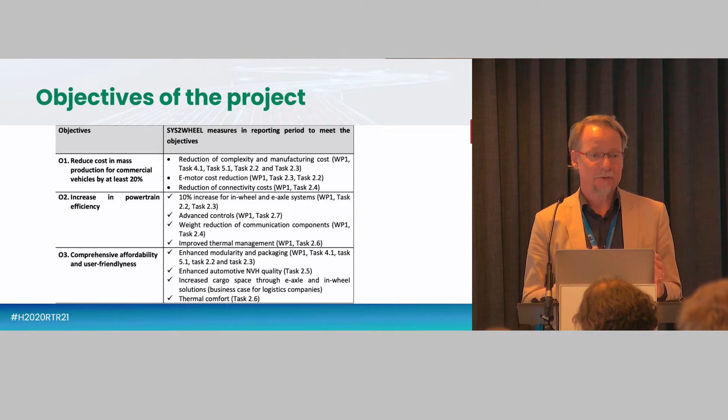So we, as Sys2Wheel, are part of a cluster of European projects where colleagues present their projects. It's called the Evolve Cluster. Evolve Cluster has its own homepage where, for all the projects in this cluster, you find dissemination material, newsletters, and quite interesting results.

Going into detail of Sys2Wheel, we are currently looking at the N1 category vehicle - remember, this is the Fiat Doblo. The Fiat Doblo is equipped with an in-wheel system: in the front we have two in-wheel motors, and in the rear this special damping system is placed, where we freed up as much space as possible for additional battery.

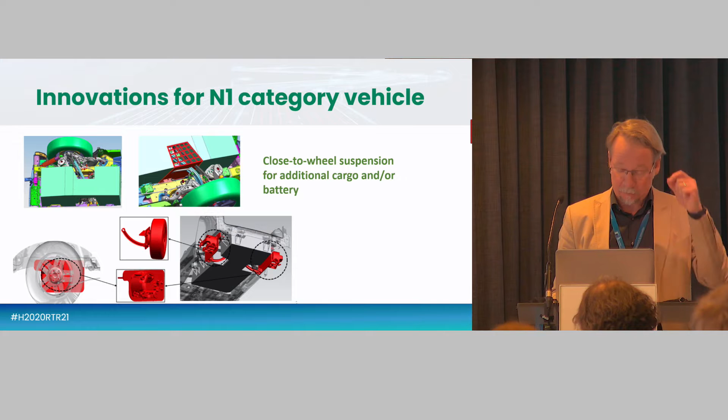So freeing the space in the center, here you see additional space available for the battery where no cells or modules could be placed before this development was installed. Here again you see the in-wheel motor in front, with additional battery space also here in the front, increasing the range.

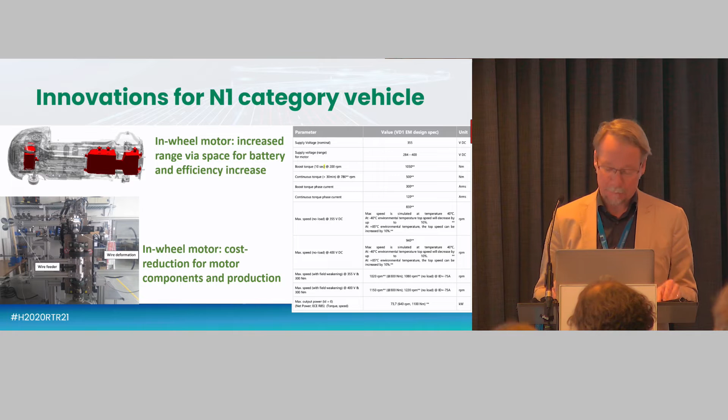So the vehicle is produced and assembled - this is as far as we got in this project with all the innovations. In the rear you do not actually see the damping system, but here you see the in-wheel motors in front with additional space for the battery.

A new cooling system has been developed, also reducing weight to a certain extent. The inverter components, also in the underhood, have been developed by Elaphe. Additional features of this vehicle include improved thermal management, as I mentioned before, and a time-sensitive network.

The time-sensitive network especially focuses on in-wheel communication between components. Some of you might know that a time-sensitive network enables safe communication in the vehicle using existing power lines, without needing additional communication cables - freeing up space and reducing weight by reducing cables for communication purposes.

Coming to the N2 type vehicle, the main innovation here is a fully modular Eaxle system. Here you see a sketch of the Eaxle, which has been produced and is currently integrated into an Iveco Daily.

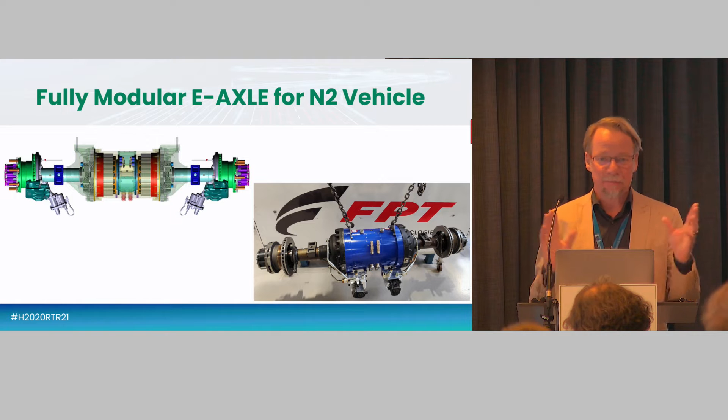Another feature is that the Eaxle consists of two different motors that can be controlled separately. This means you can also realize some torque vectoring with this Eaxle. Question is if it's needed in inner city traffic, but anyway, it's possible.

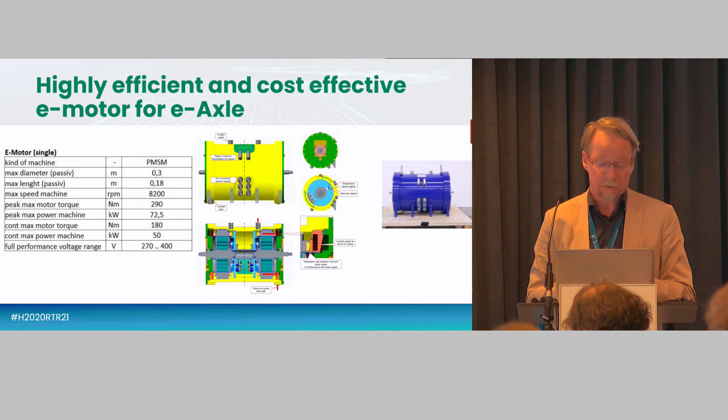Here you see the motor of the Eaxle, some 72, 74, 73 kilowatt peak power machine. It runs on 400 volt DC, with an inverter in between, of course.

So, mid to long-term expected impact. These are, of course, the impacts that are required in the call text of the GV01 call, which we meet, of course. But the more interesting thing is what happens also as some kind of side effect.

We have this from Elaphe, the in-wheel motors, and the market uptake here, the increase of number of motors sold. Elafa already started to produce this type of machine and is trying to integrate it into other vehicles as well.

The same for Elaphe, but for AVL the motor is a completely new development, and this has to be tested. There have been some issues due to COVID-19, so the tests are still lacking.

For the FPT side, the Eaxle system, this fully scalable Eaxle system, is foreseen to be put on the market end of this year, beginning of next year.

Iveco, of course, the zero emission vehicle for last mile delivery is a selling proposition. Interestingly enough, we have a very small SME on board, Habitronics. They put, for this N1 type vehicle, an energy harvesting device in the wheel, harvesting rotational energy and supplying sensors. It turned out during some advisory board meetings that this could be very useful as an additional business for logistic companies selling data collected in the wheel from road wheel contact.

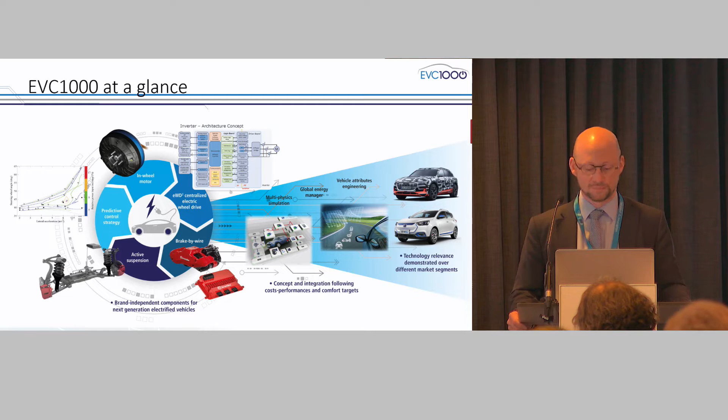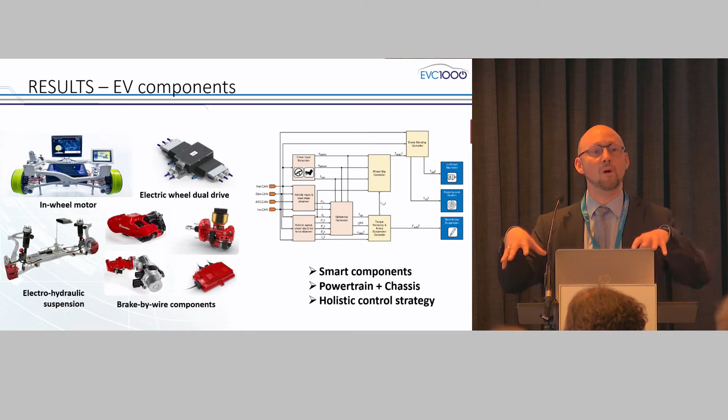So in terms of results, as we have seen before, in-wheel motor with a target to provide higher performance directly in the corner, to provide a corner solution for electromobility. Electric wheel dual drive with a target to have a better, more accurate and synchronous control of the motors. We will have as well a brake-by-wire component, in order to have more flexibility in terms of braking, and very similarly electro-hydraulic suspension, stating that for customer acceptance of electromobility, we need to improve range, reduce the cost of the battery, and take into account comfort and drivability aspects.

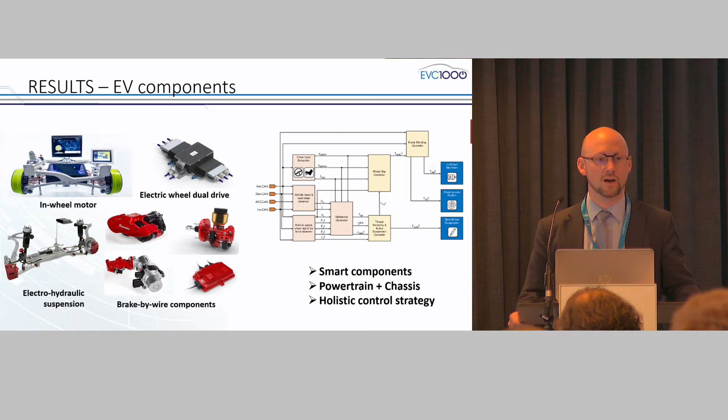This is here the target to provide different kinds of components for the powertrain and for the chassis, providing all of them a higher degree of flexibility, and to have a more advanced and more integrated control strategy at vehicle level. So here to optimize locally the efficiency of the single component, and to optimize globally at vehicle level, the operation for a specific market, for a specific targeted vehicle.

Moving to the results. Here we are in the phase to finalize a vehicle demonstration. You will have in this picture a real picture, this is ongoing work, on the Audi vehicle, where you can see on the left part the front corner with the brake system and the damper system, with Brembo and Tenneco. On the rear axle, the dual inverter mounted from Ideas & Motion, and on the rear corner, the in-wheel motor, damper system, and EMB caliper as well.

Here we are on the phase to finalize vehicle demonstrators. We are on the phase of going for homologation in order to be in the position to make a 1,000 kilometer drive on public road, and showcase that these components are sufficiently mature for later exploitation, and are in the position to really achieve the targeted project objective at the end of the day.

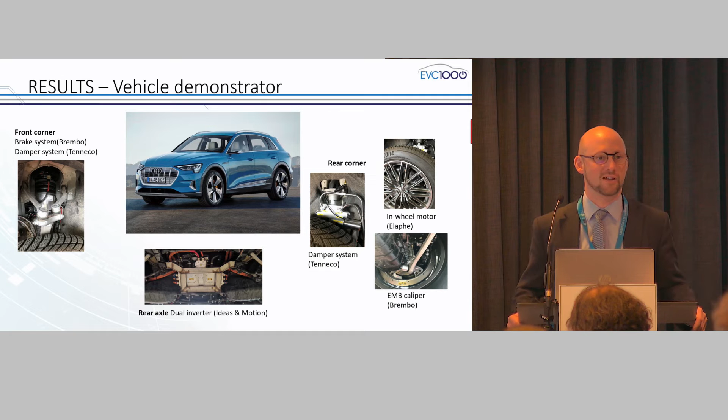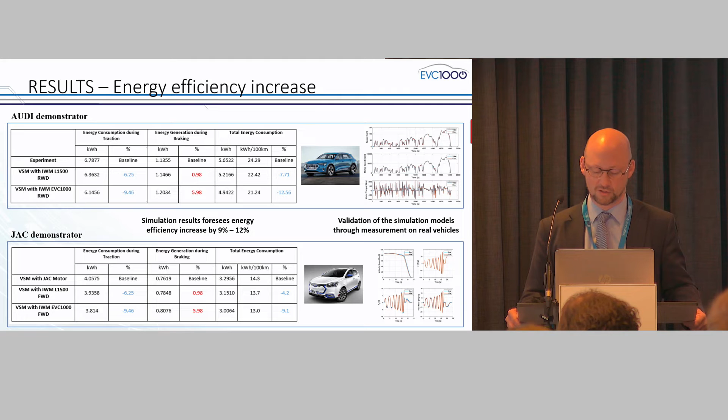Results. Very similarly, Bernard, we have already aligned our project, and we are aligning our pitch as well. We are already at the very start of the project, having preliminarily validated our target by means of simulation. During our component development, we could then validate the component-specific objectives, and for the remaining three months, we will hopefully validate these targeted objectives on a real vehicle. We'll have two vehicles in order to address these topics.

Collaboration, and I'm really happy to be here today, and I'm really happy I was there yesterday, because some of the projects we are referring to were presented already yesterday or are being presented currently today.

So here first, active collaboration with related project initiatives, focusing strongly on the E-VOLVE cluster, so that we can really exchange with sister projects, increasing impact creation through this collaboration, exchanging on specific technological aspects. You have seen that in Sys2Wheel, for example, partner Elaphe was there to provide and further enhance their in-wheel motor solution for commercial vehicles. So here we have Elaphe further on in order to improve and tailor their technology for passenger cars. This kind of collaboration has been enabled and strongly supported by the E-VOLVE cluster in this context.

I would like to mention especially the operative collaboration with the XIL4EV project, and this is an error from my side, from the VISION-xEV project as well, should be here as a second part. Rainer, please accept my apologies for that.

So here this was very interesting to have this tight collaboration with the GV02 project, providing innovative methods for the development and for the validation of EV components. This was a possibility for us to accelerate our development and validation through innovative methods, with the direct participation of different partners present in this project.

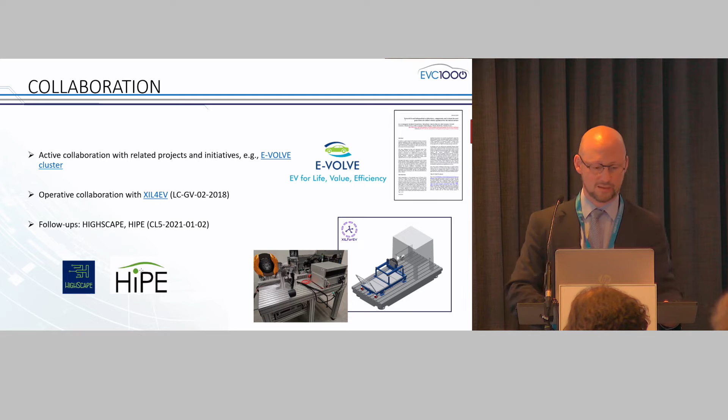In terms of impact, as mentioned at the very beginning, our target was to showcase how far these new components are scalable in terms of targeted market. This was with the usage of two vehicles, so we have the possibility to address the user-friendly, affordable EV market with a JAC vehicle, and the high-performance EV market with the Audi vehicle. So here, showcasing that these components are suitable and customizable for different kinds of markets.

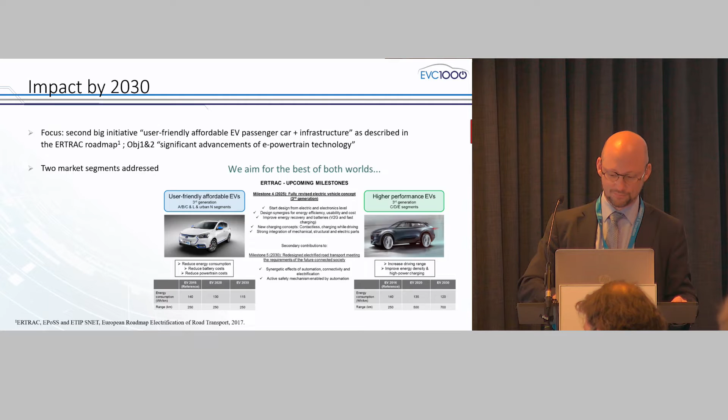Following, and the last slide from my side, here's the question in terms of impact 2030, future research needs. In our opinion, the topic of technology convergence is a very important aspect, in order to provide innovative components which are then integrated for mission-specific activity. This is a very important aspect: the convergence toward connected automated mobility, the convergence toward smart mobility, and really tailored road application.

Expected market uptake for technologies and solutions developed in our project: we have different stages of maturity. We have a component on one side which already has a high degree of maturity and will soon be available on the market. We have other partners, especially car manufacturers, who were very interested to explore the technology in order to have a sound basis to make a strategic decision on how far to move towards this technology, or what is the appropriate timeline to make this transition. So, different maturity in terms of technology, but high interest and high commitment from all the partners.

Consortium plans to ensure follow-up of project activity - already mentioned a different follow-up project already granted - and I'm really happy and proud to say that we already have bilateral collaboration that rose up out of this activity. The partners are interested to further collaborate together in a more bilateral aspect. To my opinion, this is a very strong success as well.

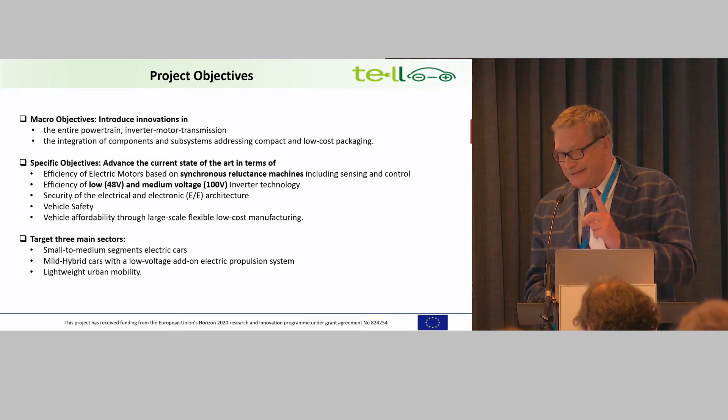I'm trying to respond to the questions of the organizers: where are you going, and also, with respect to the market, what is your perspective? The objective of the project was to develop efficient powertrains working at 100 volt and 48 volt in M1 and N1 urban electric vehicles. We are targeting three sectors: small to medium segment electric cars, mild hybrid - that was the first target, but things change at low voltage - and lightweight urban mobility.

So let me start with the development, which I consider the state of the art in the world today at 100 volt. Now, many are developing very efficient motors, but it took me years to convince Dana not to think so much about the peak efficiency, but to think about the efficiency at low RPM, because this is where the efficiency in urban drive really matters.

Have a look at the vertical efficiency you have at low RPM. This is really unique. It took Dana many years to come to that point, and this is possible only if you have silicon MOSFETs. Infineon is doing very nice work in terms of MOSFETs, but Dana took years. After they had these results, the paradox is that Dana, a small Italian company, presented this to an American company, and the American company purchased immediately because that was the state of the art in the world and remains so.

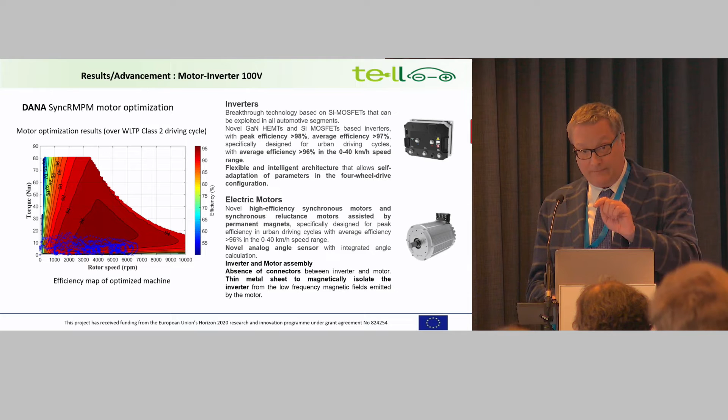And this is also for the inverter, okay, not just for the motor. So I'm going fast now, because I want to introduce you to the movies that we have also on crash test.

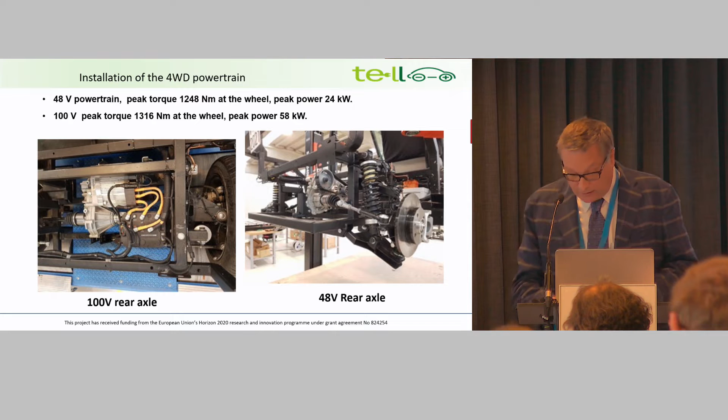So these are the two installations in the rear axle. We only have four-wheel drive in our technology. So all our vehicles are four-wheel drive.

Now let's see in terms of speed. I'm going fast, okay? At 100 volt, we tested the vehicle at 150 kilometers per hour, but we limit everything at 120. At 48 volt, the top speed we reached was around 110, but we limit the vehicles at 90 kilometers per hour. So this is what we are doing. Tests are available; we made many tests in this direction.

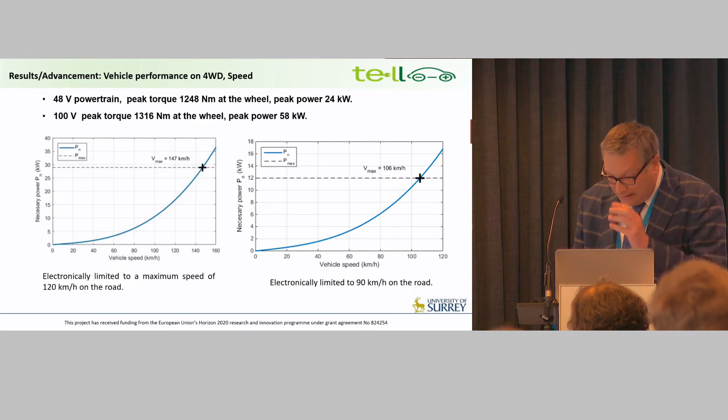Now, what about energy consumption? In the 100 volt, we personally like very much to know what is the energy consumption at constant speed before talking about the urban drive and various technologies. I like always having an idea what happens at constant speed. At a constant speed of 30 kilometers per hour in the 100 volt, we have some 45 watt hour per kilometer, at higher speed 52, 53 watt hour per kilometer.

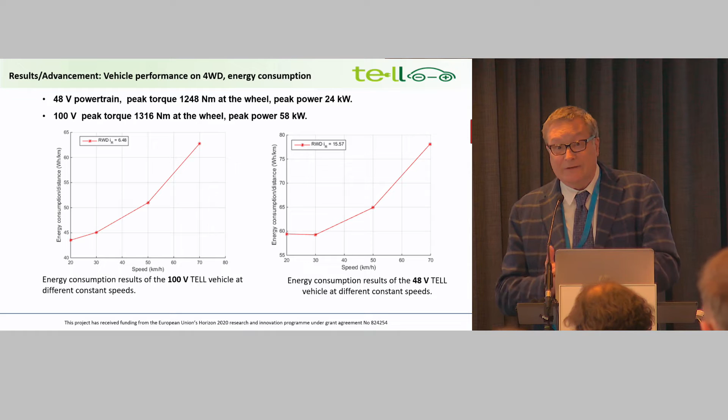In the 48 volt, the energy consumption is a little bit higher because, of course, the voltage is lower, the current is higher, and then you have higher losses in this direction.

Now, what about the acceleration? The acceleration at 0-50 in the 100 volt — these are measured values, okay, this is not simulation, I just want to specify this — is less than 3 seconds. With the 48 volt, four-wheel drive, always four-wheel drive, we are around 5 seconds or so, which is acceptable anyway.

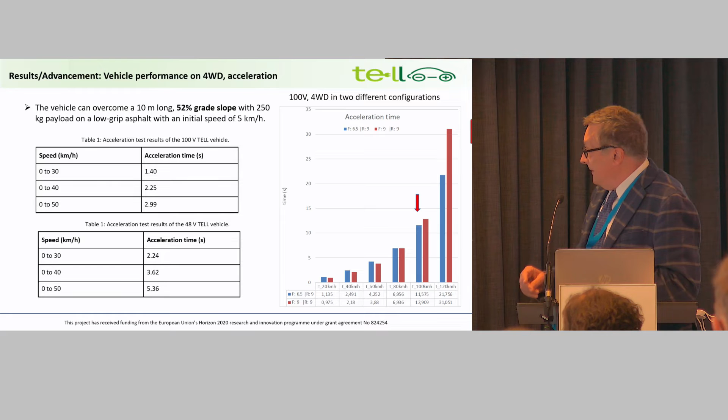I have to say that we are four-wheel drive, but specifically in the 100 volt, we do not have the same ratio front and rear. We have two different ratios: 1:6.5 in the front, 1:9 in the rear. Why two different ratios? Because if you have the same ratio, 1:9, you increase the acceleration at 0-50. But if you go to a lower ratio, you facilitate the higher speed in a shorter time. So we decided to have two different ratios, not just for four-wheel drive, but two different ratios. And this is new, by the way — we didn't copy from anybody.

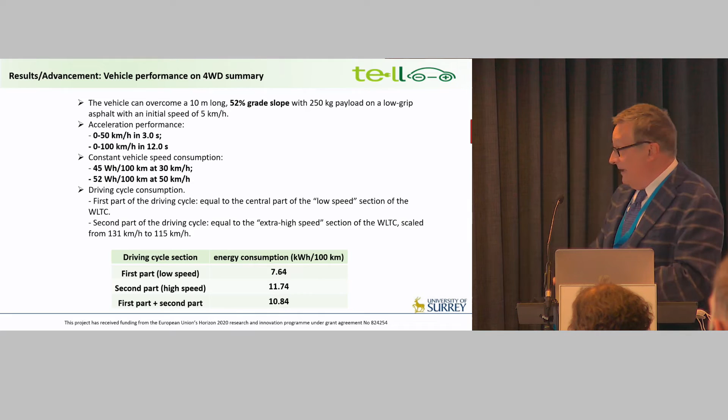In summary, the 100 volt: 0-50 in 3 seconds, 0-100 in 12 seconds. At constant speed, 45 watt hour per kilometer at 30 kilometers per hour, 52 watt hour per kilometer at higher speed — not kilowatt, I made a mistake, sorry, I canceled this morning. But people also want to know the average consumption in the WLTC cycle, and we are at 10 kilowatt hours per 100 kilometers. So in terms of energy consumption, I would say it's quite good.

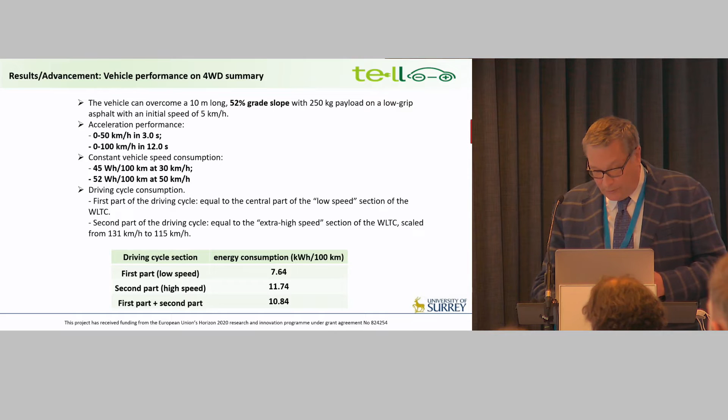I'm not going to spend time on the vehicle control because yesterday Professor Sorniotti already explained in many details how we controlled the torque in the two axles to manage the vehicle on every wet road, icy road, or soaped road, as we did. So the control of the vehicle is really fantastic, because the University of Surrey, from this point of view, is really, I would say, in Europe if not the best, very close to the best.

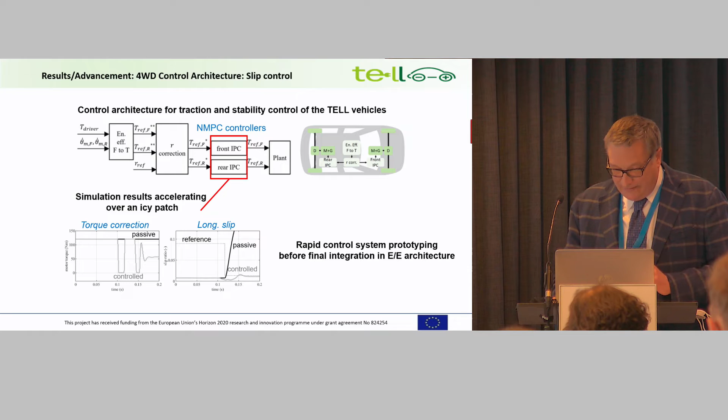But now I want to talk about what we did for the part that requires the investment, because people are talking about batteries and motors, but the real investment on making a car is not in the motor, in the battery, it's in the chassis.

We spent a lot of time over the years, thanks to the European Commission, to develop a body frame that required very low investment. If you compare the classical body frame with ours, we do not explain how we make the battery envelope, because this is still very confidential and has a lot of know-how inside to reduce investment. We are state-of-the-art from this point of view.

In fact, ArcelorMittal has asked us, as another result of the project, to use our solution for the battery envelope for their customers. This is not a secondary aspect - no investment, against the many millions that people spend on making battery envelopes.

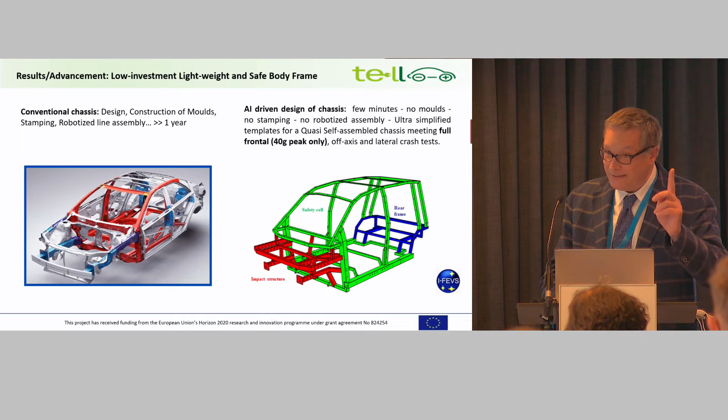So now we made crash tests. To make crash tests, people in the automotive world understand that it takes many millions to make physical crash tests. Of course, we are a small entity, but thanks to collaborating with CIDAUT, Javier is here, we made all physical crash tests, but the cars we developed for the crash test use doors produced in a production line for us and only for us.

We have a pilot making these doors, and this is another result because Magnetto Automotive, producing the doors for us now, is also delivering doors to others. The investment to make this door only in steel - we are the specialist on steel, as you will see later - only steel requires from 15 to 20% of the usual investment on making doors in steel. That's why people care, because today the upfront investment is what really matters in the automotive world, more than yesterday.

So this is real production. The windshields are real production made by us, by Pilkington, only for us. And then the bumpers and everything - we only left some spaces to understand during the crash what was really happening in the absorption area. But we needed to make many vehicles of this in a single project.

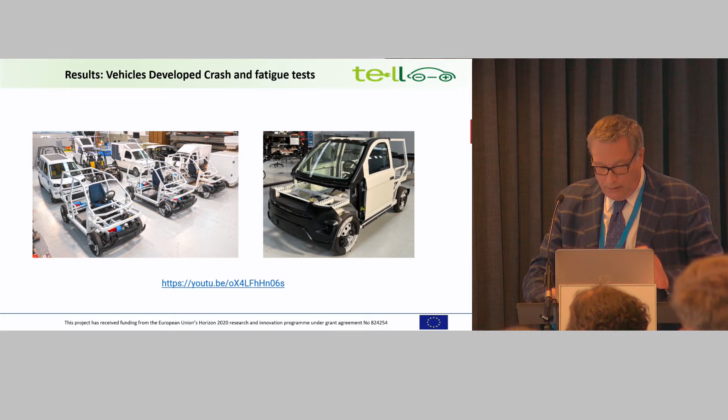So let's see - I have to launch the 2-minute video of all physical crash tests, proving that these are state-of-the-art results for this type of vehicle. No speculation, these are real. And also, CIDAUT is a specialist on this.

You see, these are real vehicles developed, but you will see now the physical crash test performed by CIDAUT. CIDAUT did indeed very nice work also to support us in the simulation. These are the classical tests for the full frontal, lateral crash test, the off-axis. So this is the real test, and these are the results.

You see that the result is lower than 40G, which is 15G less than what you have in city cars today in Europe - 15G less. This is the off-axis, and you see the performance. First of all, no breakage of the windshield. You see that all biomechanical parameters are lower than what the regulation is asking.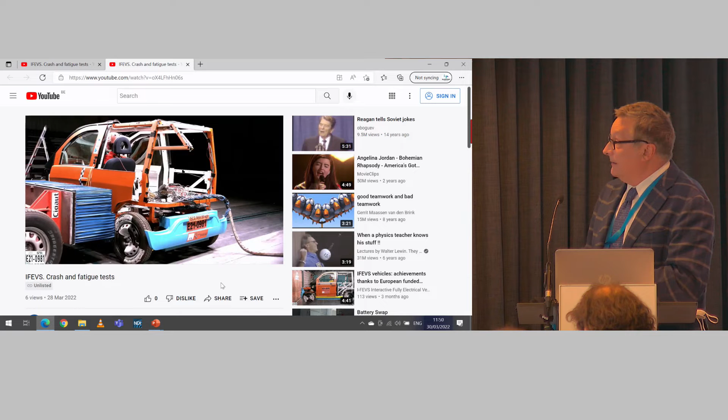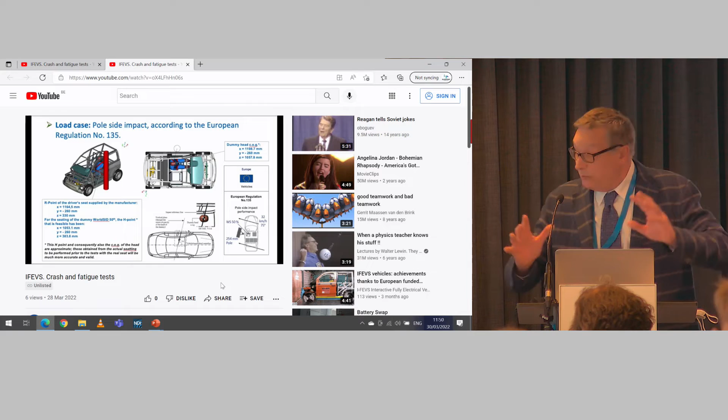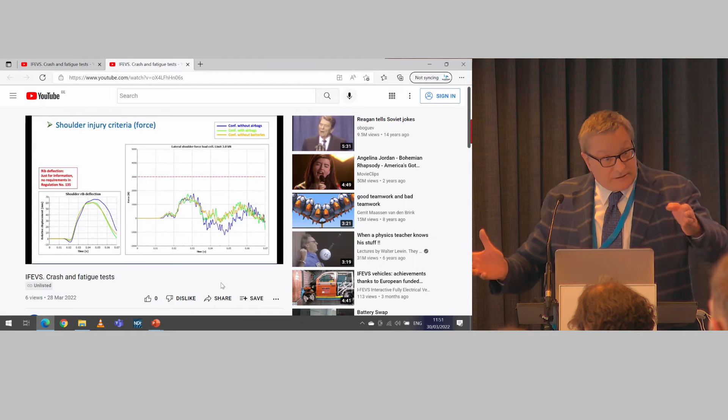You see the lateral crash test here also, and the parameters for the lateral crash test are very good, I would say state-of-the-art for this type of vehicle, certified by CIDAUT, which is a specialist in this. Then we still do not have the real field test, but we made the simulation. We understand that we are very close to what the regulation is asking for the pole test as well. One vehicle is still there to finalize this aspect because the project is finished, but we are continuing in another project, Multimoby, to comply with this.

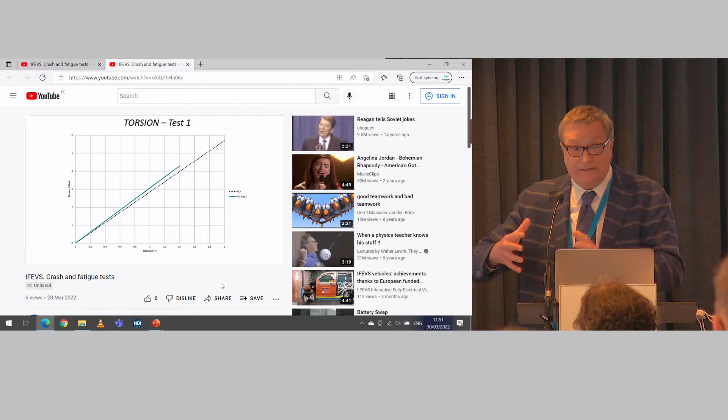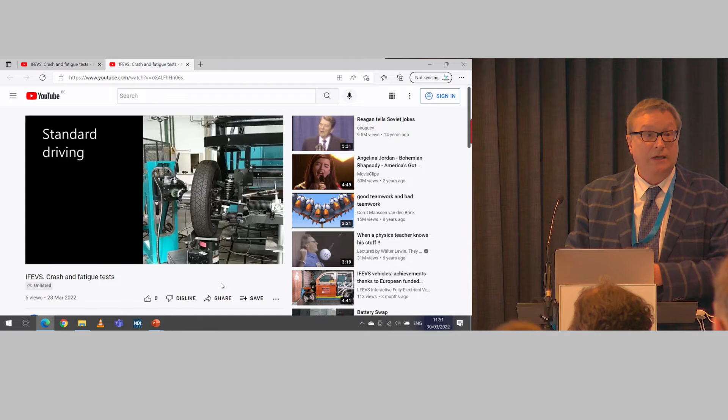Then we did various torsional and bending tests, 1 million cycles here to test the body frame, because we want to make safety first of all. I can confirm that the results here are very good because there are no cracks, no deformation in the body frame after 1 million cycles, as the regulation is asking.

So I would say that we have finished this part of the presentation. I can close here for some seconds and continue with the presentation, I hope.

Yes, so now the real vehicles are really there. We have the same body frame for all cars, whether it is a pickup, a passenger car, or a van. The body frame is the same.

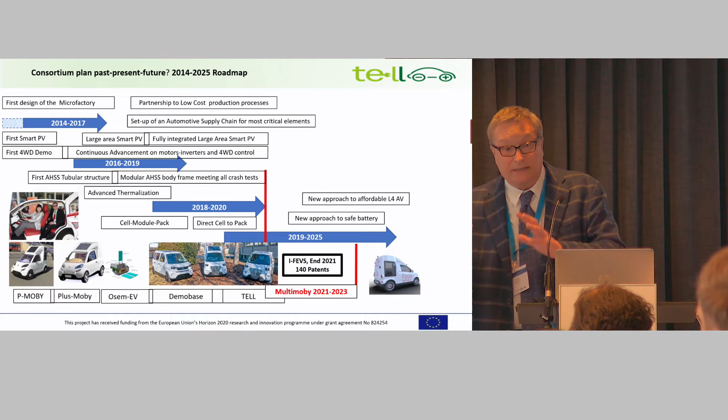We are continuing now looking at Multimoby, a new approach towards autonomous driving without LiDARs and without radars, but using gimbals, infrared and visible cameras. But what's also important as a fallout of the project is that we are specialists in steel, and we say we want to develop bikes, because bikes are the game coming.

We use the same technology that we used for the body frame to produce bikes, using only super high-strength steel tubular and metal sheets, as you see on the bottom. We have 20 patents just on this. And from next week, we will start selling bikes, which we will pre-sell.

But in June, we will come in, as we have been invited by the European Commission to make, let's say, a roadshow at the Bauhaus Festival. And now I want to provoke you with two slides.

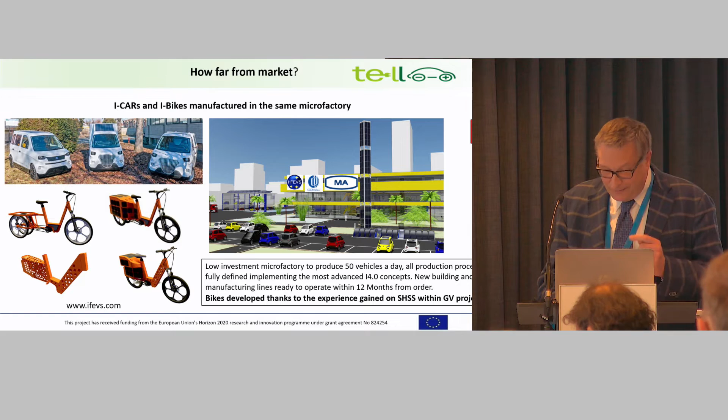So we need 100 million e-bikes by 2030. This is a fact, this is a conservative projection of CONEBI and all cycling associations. Conservative, I close. And now, the most impressive slide.

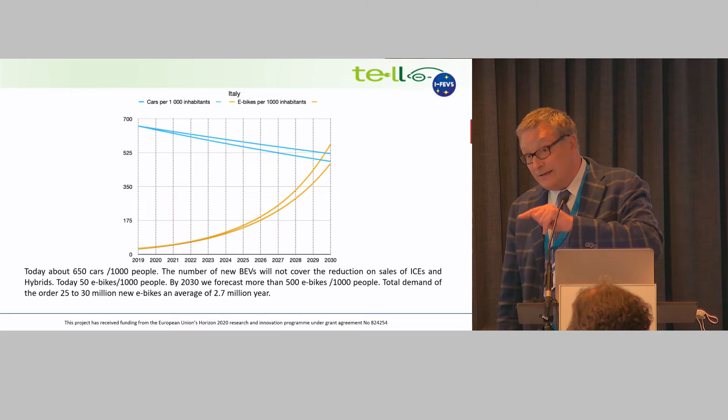Have a look at Italy, Germany, France, Spain - almost all the same. Today we have 650 cars per 1,000 people altogether. In 2030, the number of cars per 1,000 people will decrease. This is a positive point of view, because the negative is much less than that. But the number of EVs will not replace the number of internal combustion engine vehicles. This is taken for granted by almost everybody.

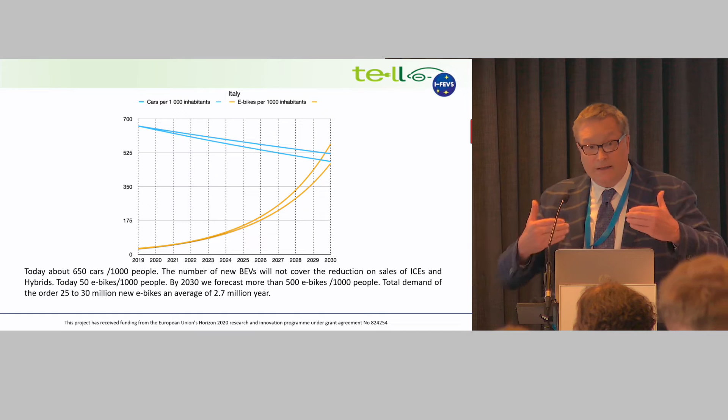But look at what's going on for the bikes. Today we have 50 e-bikes per every 1,000 people. If you look at the projection I showed before, in 2030 in Italy we will have 500 e-bikes per 1,000 people. Whether you like it or not, this will happen. This is a conservative projection, not a speculative one. So the bike world is exploding. And that's that - I thank everybody for the courtesy.

The last question is: could you do this work without the European Commission? No, sorry - without the European Commission we could do nothing of this. The European Commission is the most serious environment where you can apply and compete.

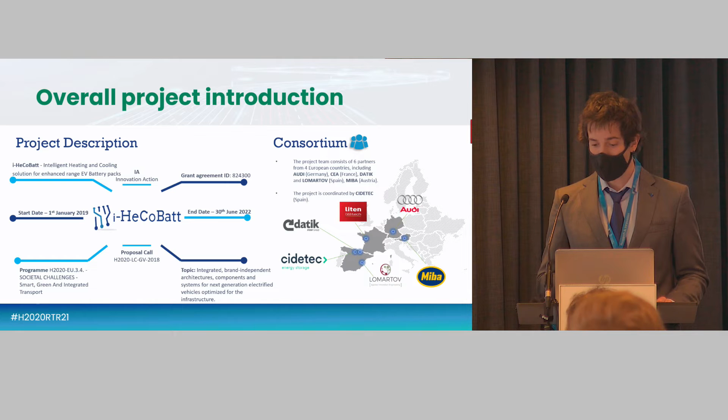Just to mention that we are a small consortium of 6 partners, with CIDETEC Energy Storage coordinating the consortium, and where we have Audi, MIBA, another research center that is CEA, LOMARTOV and DATIK.

This project has 5 main objectives. The first is to increase the powertrain overall efficiency up to 5%. The second will be to reduce the total cost of the whole thermal system by at least 20%. The third will be to integrate new components and functionalities - this will be the smartness of the project, leading to higher user-friendliness, reduction of range anxiety, and reduced temperature impact on the degradation of the battery pack.

The fourth will be to achieve automotive class quality, which we have achieved thanks to Audi being involved in all the work packages. And then, to generate some demonstrations to demonstrate the efficiency increase and addition of new functionalities in the vehicle.

In this case, what we have done is a prototype of the heat exchanger assembled in a battery pack, and it has been tested at lab level. And then we have developed a B-sample, an industrialized version of that prototype, in a virtual way.

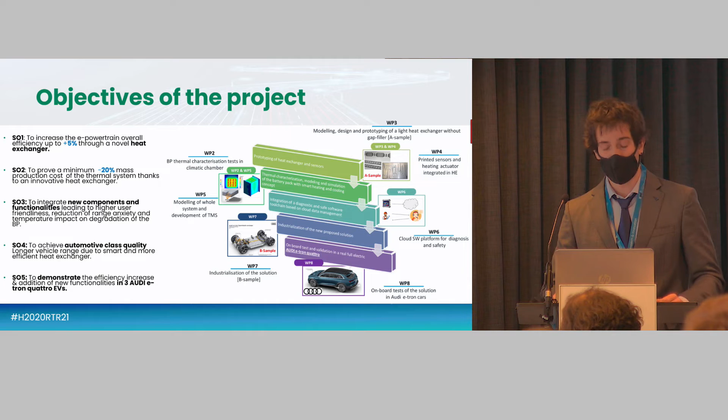More or less, you can find here the workflow of the whole project, but what is important is the result of the project. We have 3 months to finish the whole project, and we have already gotten some values of the KPIs and some results.

The first one is that we have been able to design and manufacture a heat exchanger based on MIBA's FLEXcooler technology. Here are some examples from MIBA's webpage. This has been assembled in an Audi e-tron battery pack.

Additionally, on the designed heat exchanger, we have printed thermal sensors and heaters, heating actuators, which simplifies a lot of the assembly process of the whole battery pack.

And here we have some values, where some of them are not completely quantified, but I wanted to highlight some: we have reduced 22 kilograms of the whole battery pack, and also we are able to provide more energy, so we heat the batteries more while requiring less cooling power from the thermal system. This is representative, it shows how the new heat exchanger has higher heat transmission capability.

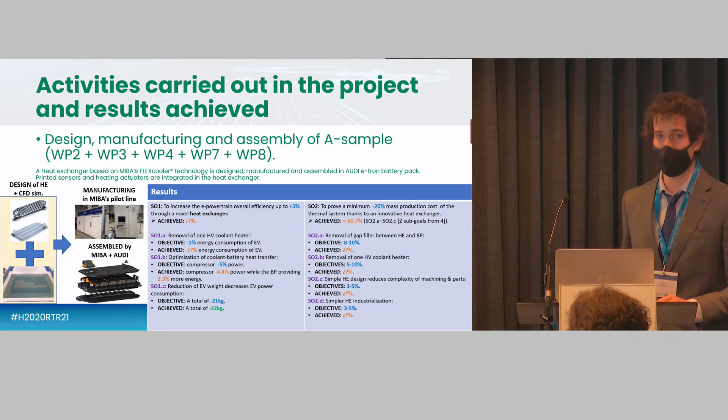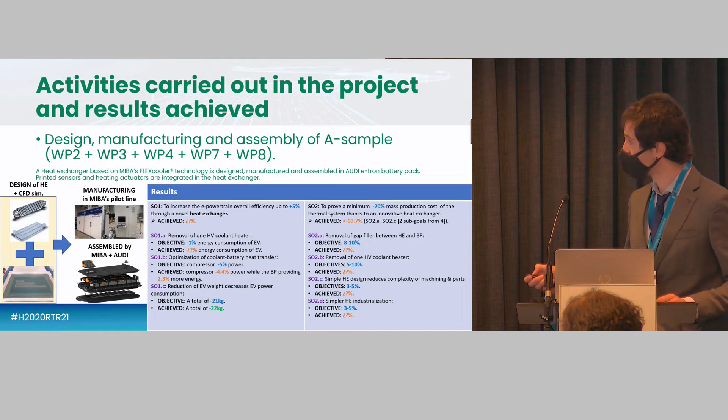Then in terms of cost, there is a problem in this case, because it's not simple or direct, the changes we have done into the thermal system and the sub-objectives we had. We have seen that the main cost reduction, almost 99% of the quantified one, comes from the removal of gap filler between heat exchanger and battery pack. The simpler heat exchanger design, with less complexity, was around 1% of this 60% reduction on the cost.

Then another result of the project has been the work done by both research centers, CEA and CIDETEC, regarding the modeling of the battery heat exchangers and the battery pack itself. We developed a modeling library in MATLAB Simulink that, thanks to the CFD simulations, reduced considerably the computational cost of the modeling.

Then, to address all the smartness and additional value to the project, we developed a smart controller that will be presented at a conference in May and published as a proceeding in a journal. In parallel, we also developed and validated the concept of a machine learning based controller, available in MDPI Energies.

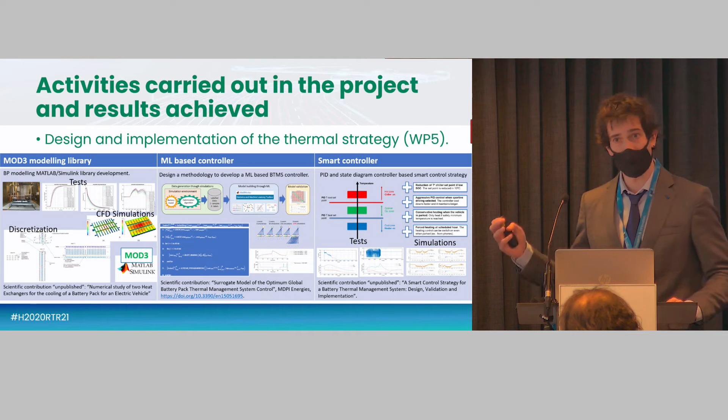And if you want, these results are public, so you can check them and use them for your projects, of course.

Another result is the software tool for external diagnosis and safety and secure data cloud management, developed mainly by Datik. We can find here the interface of the software as well as the tablet where this software was installed. This will make the bridge between the vehicle and the user.

The user, or even the OEM, will be able to observe in real time what is happening in that battery pack. As well, they integrated via Simulink blocks the developed thermal control strategy.

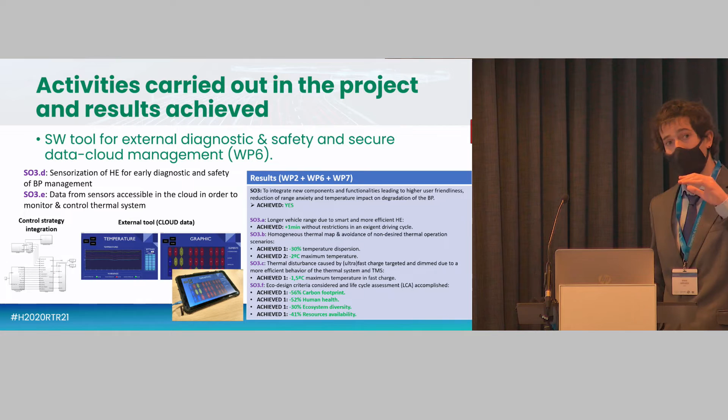In this slide, I wanted to focus on two aspects. One is the homogeneous thermal map and avoidance of non-desired thermal operation scenarios, where, thanks to the hardware itself, the developed heat exchanger, we were able to obtain 30% less temperature dispersion between modules and cells, which is something seen with the prototype.

And then we were able to get a relevant reduction on the carbon footprint impact, human health impact, ecosystem diversity impact, and resources availability impact.

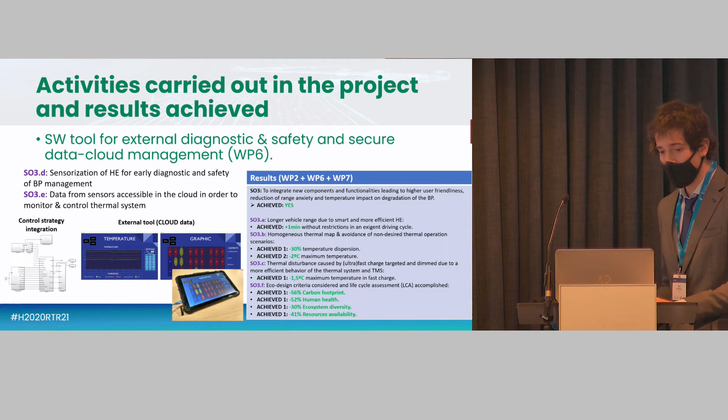Then what we did is the virtual B-sample. There is, I'm sorry, an updated version of this presentation, but I know the numbers, so it's okay. So what we did is assemble the prototype physically, and due to the limited time we had, we virtually developed the industrial version of that prototype.

We took all the results from the testing of the prototype. Based on those results, we redesigned that prototype, and based on CFD simulations, we give some expectations of what the improvements of the new design will be.

In terms of cost, it will be the same, but there will be an increase of 5% due to the industrialization of that system. So we should add to this 65% more in the reduction of the cost.

In terms of the overall power efficiency, we expect it to be slightly worse because the industrialized version was focused on reducing the temperature dispersion from 30 to 50%, which we validated through the CFD simulations. But this lower dispersion brings us a slightly higher mean temperature, meaning we will require slightly higher refrigeration power. But we were able to have a more homogeneous temperature spread, and we were able also to decrease these values, which went from 5 to 10% lower.

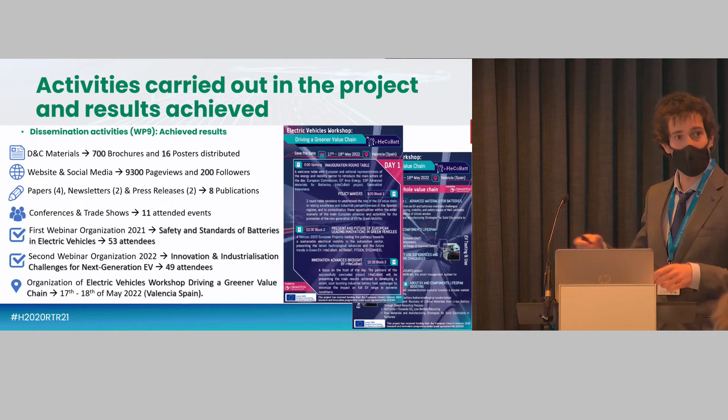And just to finish with the results, the project is already in the end of the project. It ends in June. We have an electric vehicle workshop on the 17th and 18th of May that will take place in Valencia. It will be a hybrid event, so you will be able to attend physically or remotely. The first day will focus on gathering all the key stakeholders and projects related to green vehicles, and the second day will focus on innovations at component level. You are all welcome to the workshop.

And in mid to long-term expected impact, just to mention that what is pending is to bring this industrialization to birth, to industrialize the project, and add this industrialization into the OEM fabrication manufacturing line, and also pass all the homologations in a real vehicle. But the concept is already validated, so that will be the last steps.

And just to mention that the developed technology is cost busting. There is a significant reduction in cost, and it also provides higher efficiencies, which is quite interesting for the market.

What is the contribution in general? For the Green Deal, smart and sustainable mobility strategy, etc. It will affect the affordability of the electric vehicle, since there is a significant reduction of cost. Range anxiety and safety, this public concern about vehicles, could also be improved, since we will reduce the energy consumption, and thanks to that smartness, we will be able to operate in ways that even the demonstrator, the software, and that user friendliness will help with all these concerns.

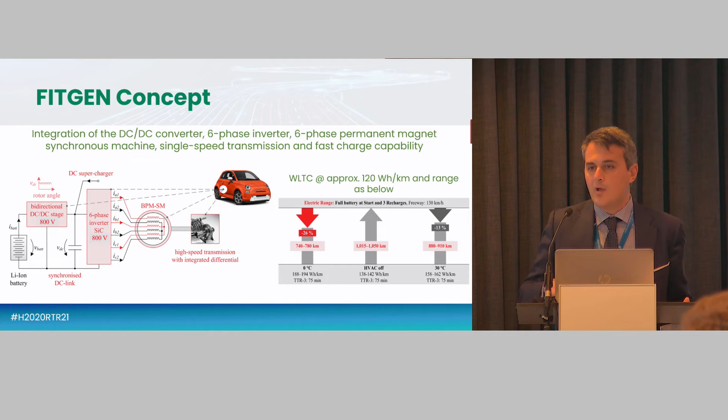The inverter is fed by the battery, but there is an extra element between the battery and the inverter, which is a bidirectional DC-DC converter. The DC-DC aims at stepping up the voltage of the battery from 400 to 800 to feed the 800-volt powertrain, but also works for enabling super fast charge, accepting 800 volt to recharge the 400-volt battery. The overall design of the FITGEN Eaxle is also fit to be coupled with an 800-volt battery by removing the DC-DC, which makes the overall architecture quite flexible and ready for different applications in different platforms.

This is the FITGEN implementation plan. Beyond the definition of the detail of the electrical architecture of the Eaxle, the project is built around three main technological work packages - what you see here as the core, WP2, WP3, and WP4 - each aiming at delivering a technology brick of the Eaxle itself.

Area 1 tackles the power electronics, delivering the silicon carbide inverter, the DC-DC converter, and the fast charging enabler. Area 2 is all about the motor, delivering the high-speed permanent magnet electric motor and the transmission. Area 3 is devoted to the design of the cooling circuit and the control algorithm.

Everything converges into WP5, which is about prototyping of the components, assembling of the Eaxle, and testing and qualification of the Eaxle on the bench at TRL 6, to step up in WP6, where we have the vehicle integration and the demonstration of the Eaxle at TRL 7. On top of that, we have, as usual, exploitation, dissemination, communication, and project management.

We stand today here at the end of WP5. We are in these weeks completing the test of the Eaxle in our drive laboratory, and we will be ready in April to ship everything to Torino for final vehicle integration and vehicle demonstration.

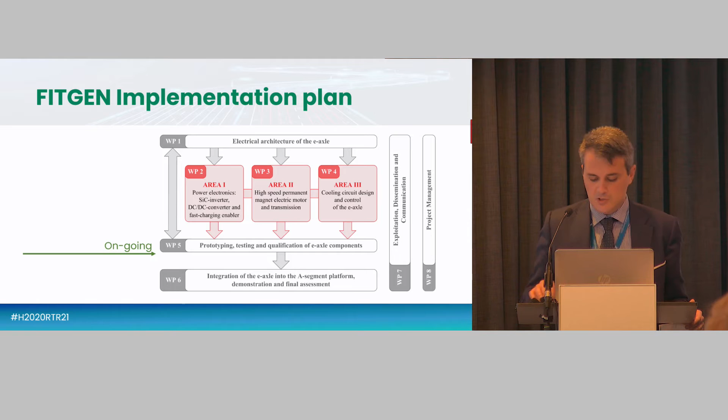Some snapshots on the results of FITGEN. One main part of FITGEN is about the motor - that's really the core area. What you see on the slide is a CAD rendering of the Eaxle, where we don't just see the motor, but also the inverter box, the transmission, and some mechanical elements connecting the driving shaft, the stub shaft with wheels. The motor is based on a synchronous approach with a patented rotor shape and delivers very high performance and very low torque ripple.

It's equipped with 1.3 kilogram of rare earth-based magnets and a patented formed Litz wire winding technology for reducing losses. We were able to achieve at the bench 23,000 RPM, which is quite beyond state of the art as of today for max speed. We also conducted at the bench a sustained overspeed test, sustaining 27.6 thousand RPM for 30 seconds without having any mechanical failure in the Eaxle.

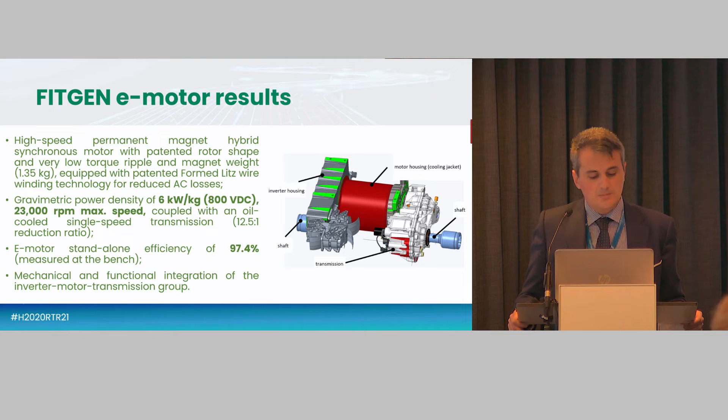The motor standalone is capable of delivering up to 6 kilowatt per kilogram, pushing the envelope at 800 volt VDC, and it's coupled with a single speed transmission with a reduction ratio of 12.5 to 1. The e-motor standalone efficiency measured at the bench is 97.4%.

Moving to the inverter, which was quite another area where we did invest many resources. The design of the inverter is completely brand new. It's based on a cascade architecture. We have two three-phase inverters connected in sequence with surface-mounted devices implementing the next generation silicon carbide switches from STMicro. We have a housing volume of 5 liters, and we were able to deliver 35 kilowatt per liter peak, also at 800 volt VDC. Here you see an exploded view of the design of the inverter with all the components inside.

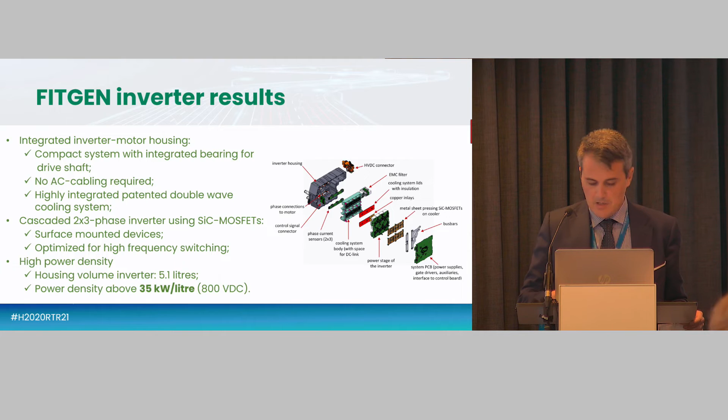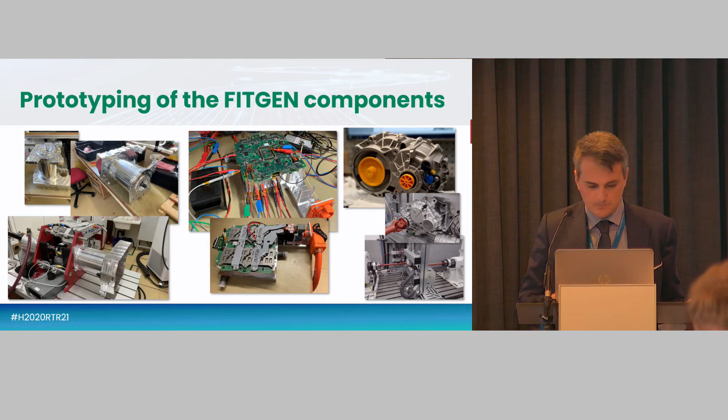And finally, the overall FITGEN Eaxle in the full assembly. This is the first of the two prototypes which we have delivered. We have two working prototypes. Duplicating is always increasing the reliability. It's a risk mitigation measure.

And what comes next is the implementation into the Fiat 500e of the FITGEN Eaxle. Here you see a CAD rendering of what we are doing. We are implementing the Eaxle on the rear axle, so going back to the classic 500 configuration. And we have the inverter motor transmission group in between the wheels and the DC-DC on top. The DC-DC that you see here, that is basically this red box, is basically at the level of the trunk.

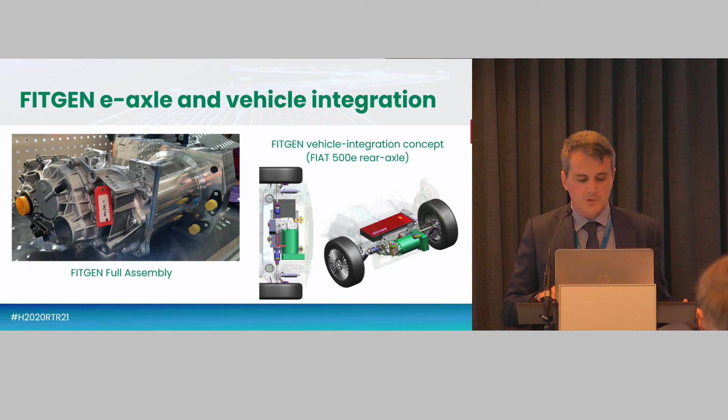So we're basically freeing all the space in front and on the back of the vehicle for enhanced usability of the vehicle itself. Some pictures also from the experimental phase. These have been taken in the AT Drive Lab, where we are testing and qualifying the Eaxle. So here you see the motor connected to our brake machine and connected to an oscilloscope and a series of cables that my technicians put in the lab to qualify the Eaxle in different configurations, and some results about the testing.

These are tests at TRL 6 on our bench. The Eaxle was capable, of course, of delivering the full WLTP driving cycle, and we were measuring quite good values of efficiency, distance, specific energy consumption, and torque and current ripples. We have over the WLTC below 1% of torque ripple against a 3% industry standard. So this is quite smooth operation of the Eaxle itself, and below 5% of current ripple.

On top of this, the Eaxle is quite energy efficient. We don't have yet the final number because we are repeating many measurements. But we measured in the first phase of the test 127 battery-to-wheel watt-hours per kilometer, which is quite beyond what is delivered today by the best-in-class market available technology.

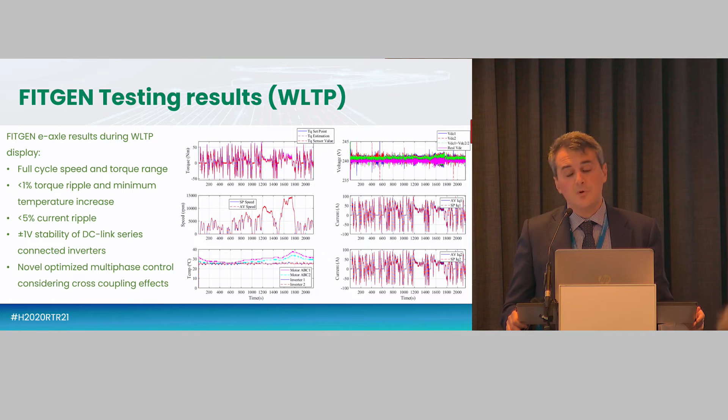The energy efficiency of the Eaxle is also confirmed by the thermal envelope of the Eaxle itself. We see that the Eaxle stays quite cool. I must say that on the first test, my technician thought that the thermocouples were broken because basically the motor was not warming up. Over the full WLTC cycle, we see that basically the inverter stays almost at room temperature, plus minus 1 degree, so it does not warm up at all. And we can see a peak temperature of the motor of 37 degrees in phase 4 of the WLTC, which is quite excellent. This is also highly suggestive that we can push this technology further to the thermal envelope, and we can extract even more performance than what we have done so far.

Some conclusions and some mid to long term expected impact of the project. Again, we were able to extract up to 6 kilowatts per kilogram against an initial target of 5 kilowatts per kilogram. So we were quite happy about that.

Materializing a plus 70% improvement compared to the state-of-the-art 2018, that was the reference of the project, and a good 40 to 50% compared to the state-of-the-art 2022.

What I'm doing now towards the final part of the project is also comparing FITGEN against the best-in-class technology today, not when the project was granted. We were demonstrating 23,000 RPM, beyond the target of 18,000, which is 28% more than the best-in-class market-available technology as of today.

And 35 kilowatt per liter power density of the inverter. One side benefit that was not initially planned for FITGEN is the reduction of the weight of the magnets. Thanks to the design and to the high-speed operation of the motor, we were able to reduce the magnet weight.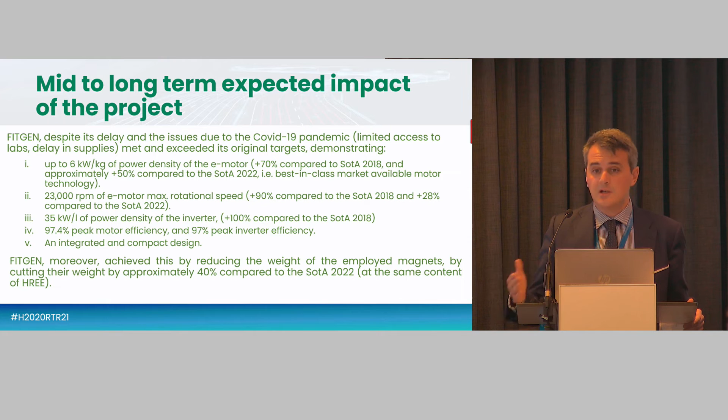That's a 40% reduction compared to the state-of-the-art 2022, where state-of-the-art 2022 is basically the average between Tesla 3 and Volkswagen ID3. We were not performing research on the magnets, so we were not aiming at reducing the percentage content of rare earths, but by reducing the weight of the magnets, we intrinsically reduced the content of rare earths overall in the motor.

Concluding, FITGEN is at present one of the most performance-dense prototypes of E-axle in Europe, to my knowledge, and it's an excellent technological basis for advancing this technology further.

I'm also thinking about what FITGEN did not do. FITGEN did not perform any work on the magnets, just relying on the best-in-class technology available for purchase. Pushing in that direction would further improve the overall design. Also, although FITGEN was complemented by an eco-design and an LCA, it did not do a full recycling demonstration. This is something that's also on the roadmap for development after the project.